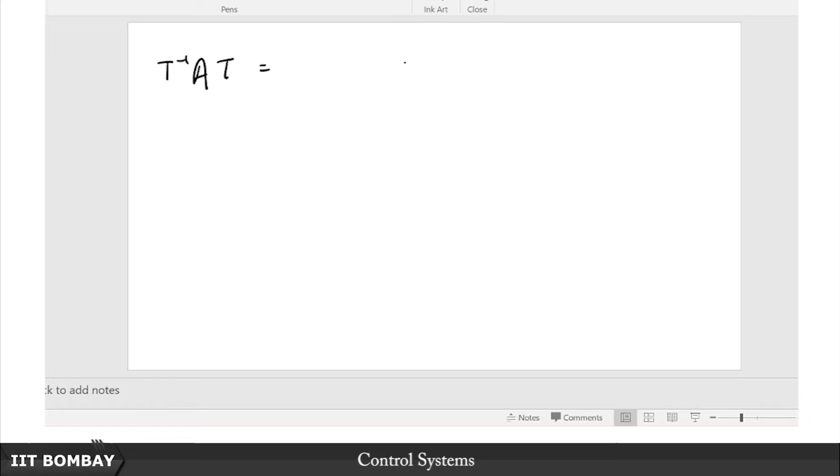So to convince ourselves of this fact, we will again resort to taking a matrix to its Jordan canonical form. I do not want to go into other linear algebraic tools. One tool is enough, and it will turn out that even though in some cases it is not the most convenient tool, it will still suffice to convince you that if you have this T, then T inverse A T, there always exists such a T inverse such that you can take this matrix A, any square matrix A, to a Jordan form, and correspondingly the B matrix will be transformed to T inverse B.

So what does the typical Jordan form look like? We have seen that lambda 1, lambda 2 till lambda r, that is one sort of Jordan block. This is another type of Jordan block. Of course there can be many more such blocks, I am just drawing one typical sample of each.

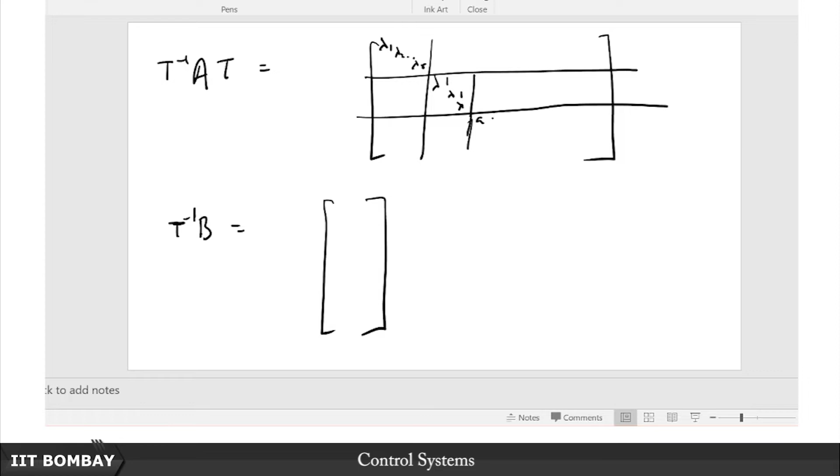Then there is this block, the way I have drawn it is probably A B minus B A, it does not matter, you can allow B to have any sign and it does not matter really. That is one type of Jordan block. Then there is another type, where you can have complex poles also repeated. So A, B, or A1, B1 minus B1, A1, then A1, B1 minus B1, A1, and then I2 here. So you can have this type of Jordan block as well.

So we have seen when this system fails to be controllable: when you look at the A matrix and find that in this diagonal block some diagonal entries are not distinct. So when some diagonal entries are not distinct, we have seen that it loses controllability and therefore also minimality by extension. So what happens when some diagonal entries are not distinct? Consider only this small block here, because these blocks are decoupled. I am going to just consider the small block here that corresponds to this, and this is of size R.

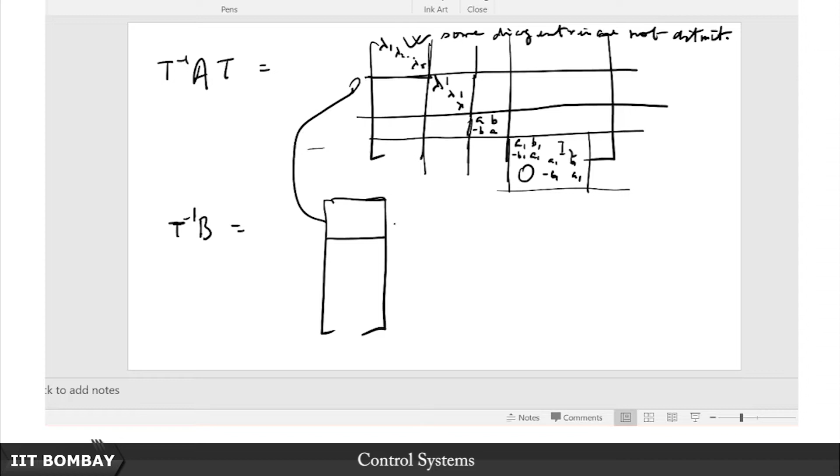So the first R entry, this is BR. T inverse B, I am only considering the first R, and this T inverse AT, I am considering the first R cross R block. So what does the structure look like?

Suppose this structure looks like lambda 1, lambda 2 till lambda R, and suppose you have this B matrix, this T inverse B, which also has some entries B1, B2, BR. Suppose these are non-zero. Of course if one of them is 0, then you immediately see that the dynamics is not at all affected by U.

So first let us start with the easy observation. Look at B, we'll get back to A later. So when does a system in the Jordan canonical form fail to be controllable on account of the structure of B? When for this diagonal block any one of these entries is 0.

So if any one of these entries is 0 here, what happens? You see that particular system's mode, that particular eigenvalue, that particular system's mode will be xi dot equals lambda I x, and no matter what input you apply, it will not be reflected here. So clearly whatever gains you might design, it is not going to affect the dynamics of this mode, so it is going to remain uncontrollable.

Similarly, if you look at a block such as this, if both of these B entries are 0, both of these entries in the corresponding B matrix are 0 - if this is your A and this is your B matrix - then obviously nothing that you apply at the input channel ever gets passed on to the states, so it is going to be uncontrollable. You cannot place these poles.

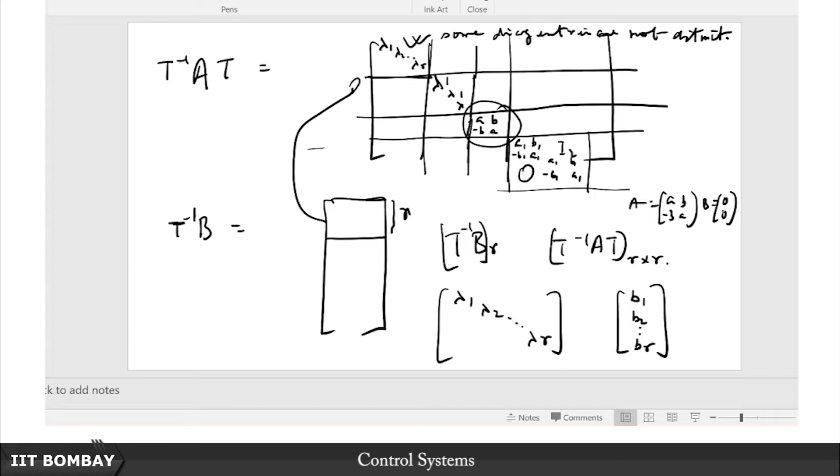Similarly here, if in this block Jordan form, if both of these last two entries of the B matrix are 0, then what happens? Nothing can affect these modes, same thing as the earlier case.

So this is going to lose controllability, and because it loses controllability, at the same time you lose the ability to place the poles, because no matter what you apply at the input, after all you are only placing the poles through a state feedback applied at the input. So if the input itself falls flat on its face, nothing is changed. So you cannot influence those particular poles, at least this last pair of complex conjugate poles.

Similarly here also in this block, if the last entry happens to be 0, then at least this pole - the others might be placeable, I do not know - but at least this pole cannot be placed. So therefore you see that the moment every condition you see in terms of the matrix B that is tantamount to lack of controllability also leads to loss of the ability to place those certain poles.

So whenever you lose controllability by one of these factors, by some entries of this B matrix being of 0 value or the other, it also immediately brings with it, like a combined package, your loss of the ability to place certain poles. So therefore loss of controllability leads to loss of pole placement ability.

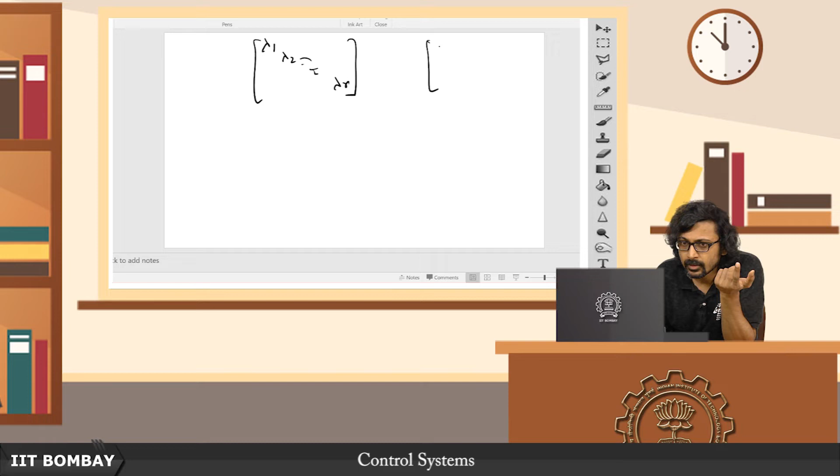So suppose if there is a diagonal - I will show you why in the block diagonal case at least - if any two of these fellows happen to be equal, then you will not be able to place your poles even if all your B entries here are going to be non-zero.

So let us say this is B and this is A. I am just going to look at the small block here. So, without loss of generality, let lambda 1 equal lambda 2. Then look what happens, and suppose your K matrix is K1 dot dot dot till Kn. So then what happens? Look at A plus BK.

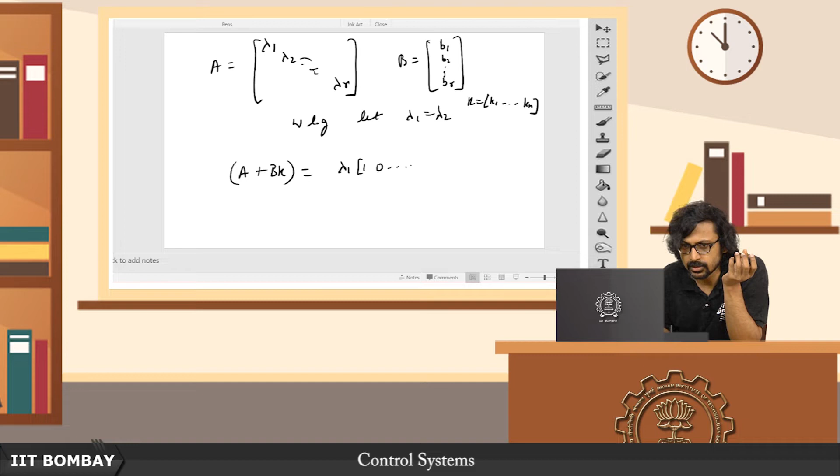A plus BK is basically lambda 1 times 1 0 0 0 - you agree this is the part coming from A, that's the first row - plus B1 times K, you agree. The second row is lambda 1 times, because lambda 1 and lambda 2 are equal, times 0 1 0 0, plus B2 times the same K. If I am just looking at the first two rows of the A plus BK matrix, then this is what it is.

Now we have assumed that lambda 1 is equal to lambda 2. Now notice what I am going to do is find the determinant of this - or rather, what I am going to do is find the determinant of lambda I minus this, because I want to find out the characteristic polynomial. So this will require me to find out lambda I minus this whole fellow's determinant. Sorry about the atrocious notation here. So this is what I am trying to do.

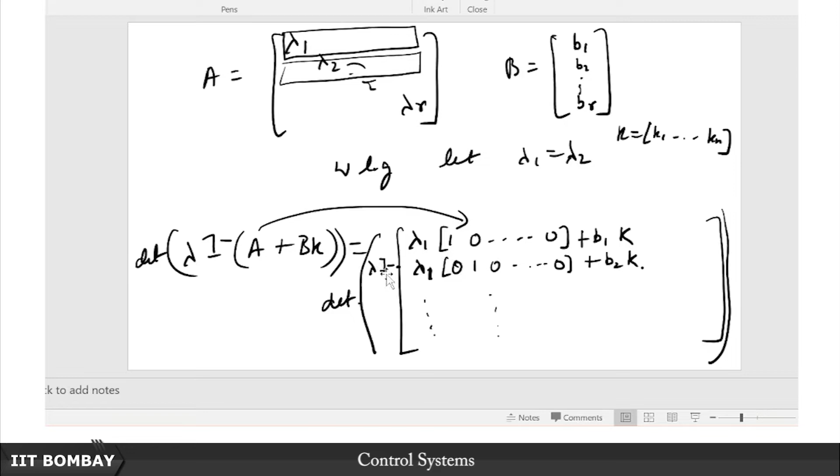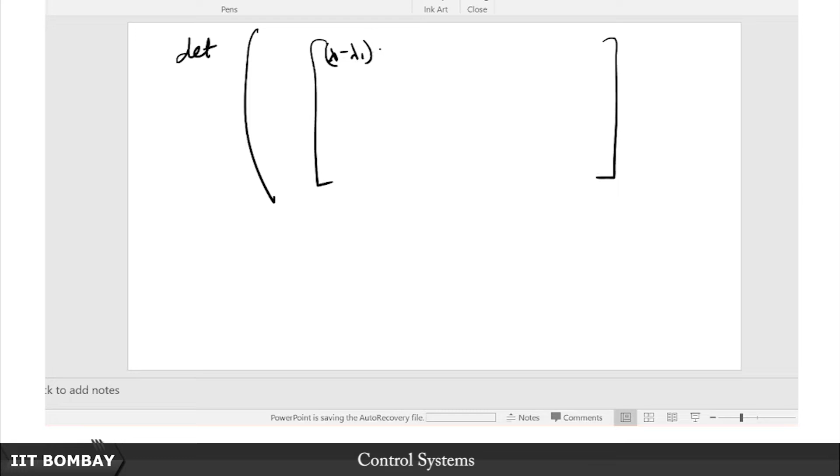I do not care about the other columns, let us just focus our attention on the two entries of this diagonal block which are equal. What happens then? Now you notice this is going to be nothing but, well, what is this lambda I? So now I am going to write the first two entries. This is going to be the determinant of this big matrix - lambda minus lambda 1 times 1 0 minus B1K, and this is also lambda minus lambda 1 times, but the vector is different, 0 1 0 dot dot dot minus B2K.

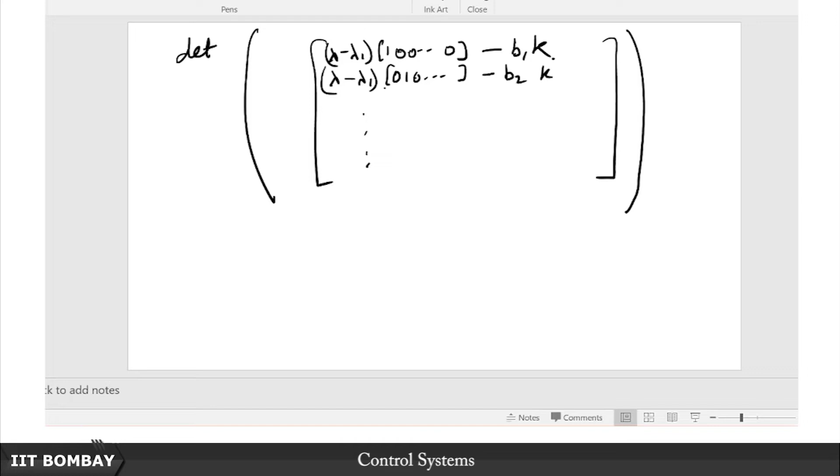Now if I want to find the determinant of this, you see what I can do is, since determinants are invariant to row operations - in row 1 I am going to change it as row 1 minus B1 by B2 times row 2, okay. So row 1 becomes row 1 minus B1 by B2 times row 2, and I place it back.

So what happens then? Just refresh your knowledge of determinants, if you have forgotten the operation, this is how we do it. We have lambda minus lambda 1 times 1 0 0 minus B1K minus B1 by B2, again lambda minus lambda 1 times 0 1 0 plus B1K. So this B1K and B1K will cancel out.

What am I left with then? You see, from the whole of this row I can take this factor out common, lambda minus lambda 1, and then I am left with this determinant. I do not care about the second row anymore, I have retained it as it is - this is my R2, this is my R1. So the second row I retained as it is, the first row I changed by operation, and now I am taking lambda minus lambda 1 out common from the first row, because I can - that's a standard determinant operation.

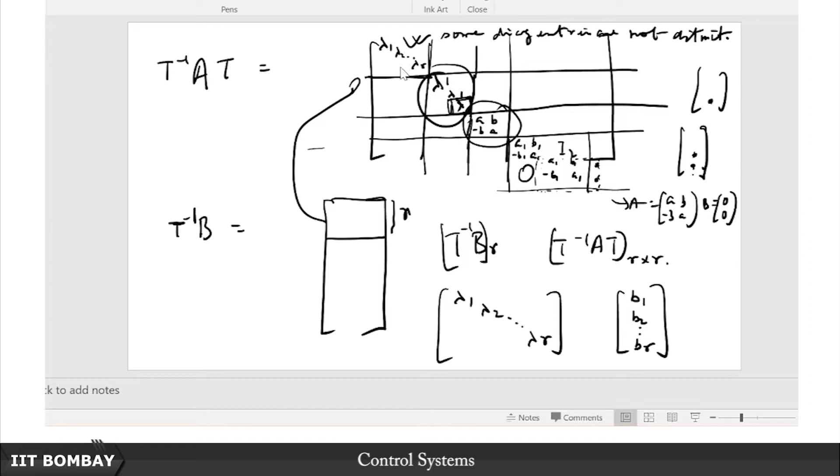Now that means that lambda 1, whether I like it or not, is always going to be a pole of the closed loop system. Lambda 1 was the pole of the open loop system, and lambda 1 will also continue to be a pole of the closed loop system, and that is only happening because I had some repetition of eigenvalues, or repetition of entries in the diagonals of this diagonal block, which is tantamount to loss of controllability. So loss of controllability tells me it is also going to lead to my loss of ability to place this particular pole which was repeated in the diagonal block.

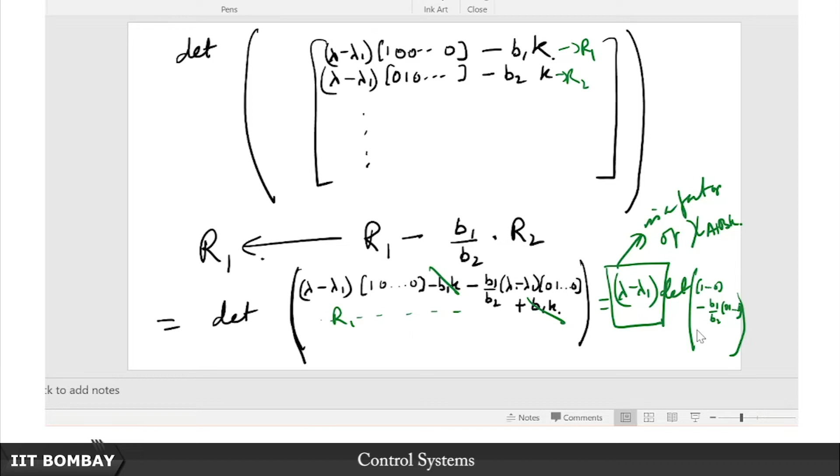So whether you lose controllability due to the structure of the B matrix or due to the structure of the A matrix—I haven't tackled the complex block, that I leave to you as homework—it is always going to lead to your inability to place some pole or the other. Some open loop poles will continue to remain closed loop poles, you cannot place them, they are the stubborn ones. So controllability is not just a sufficient condition as we saw previously, it is also a necessary condition for your ability to place each and every pole of the system.

That is the point I wanted to highlight, and hopefully I have convinced you that controllability is not just important for taking states from one point to another in the state space, but also has functional utility in controller synthesis. It is this property of controllability which allows you to design a linear state feedback, enabling you to place your closed loop poles anywhere you like.

So this looks like a triumph of modern control theory, a big result. Earlier we struggled to even stabilize an unstable system using root locus based methods, as highlighted a couple of lectures back with an example. If you have a pole on the right half plane and maybe a zero at the origin, no matter what stable controller you apply—P, PD or whatever—you cannot use an unstable controller, that only makes matters worse. You always end up with one of your poles on the right half plane. So that is a failure in some sense, but this is where modern control apparently triumphs.

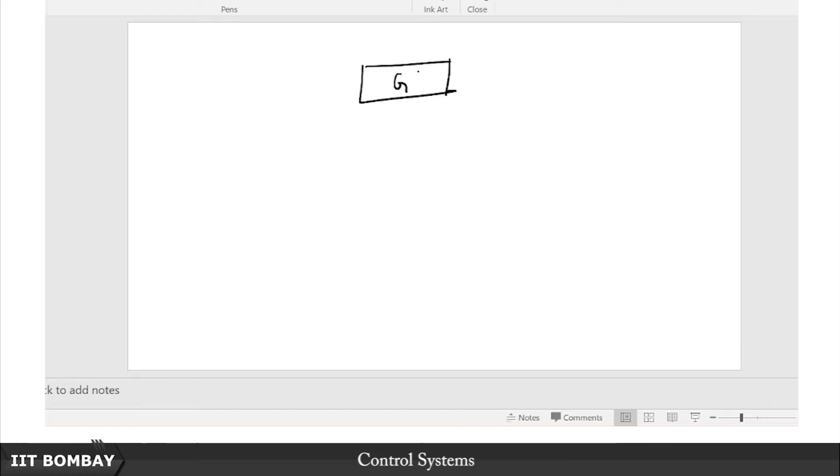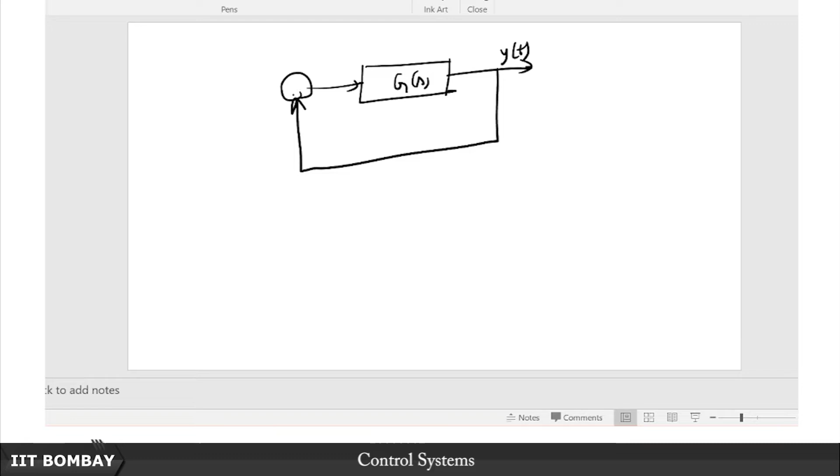But those of you nitpicking further would point out that I made a very strong assumption. Earlier you had the system G(s), with output Y and input, so you could only feed back this Y. This classical control method was crippled because it was compelled to use only the output—that is also because classical control does not take into account internal behaviors.

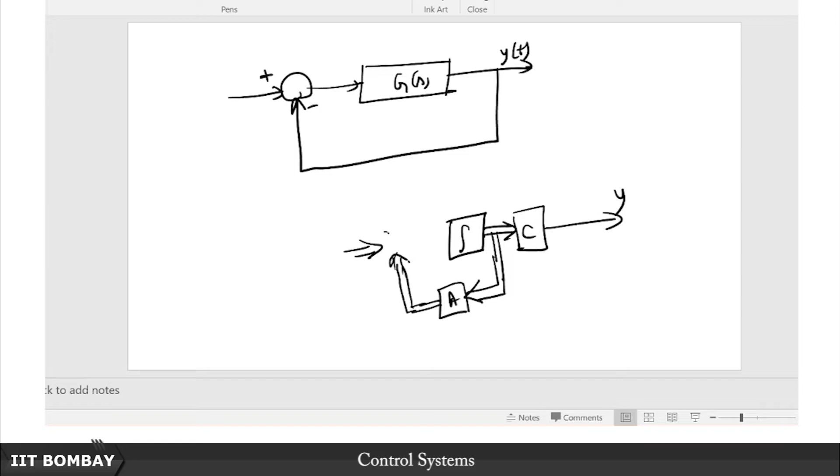But you might say, hang on, you are accounting for internal behavior through your state space, but that is tantamount to ripping it open—because what are you doing? You have this integrator here, these states coming out, passed through C to get your Y, and you feed it back through this channel with the A matrix. This is your effective state space design: X dot equals AX plus BU, with U coming in through the B matrix. So this was your basic design.

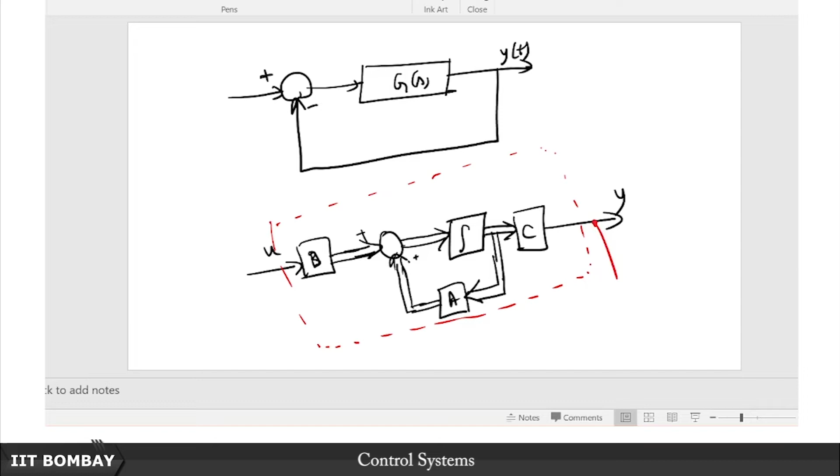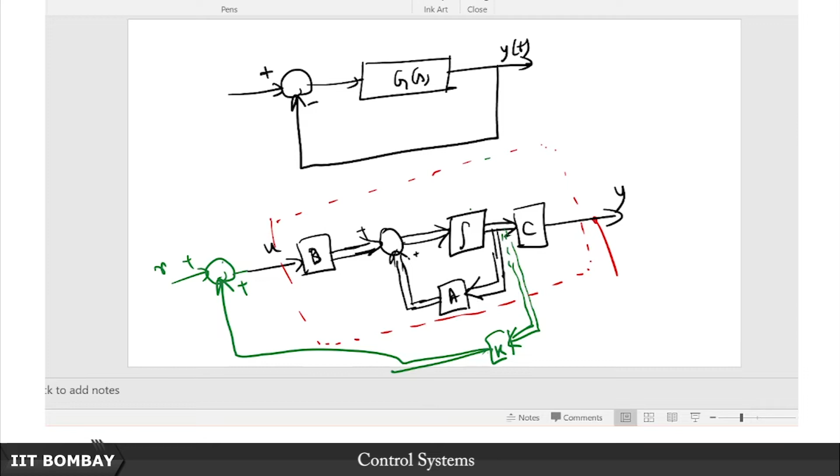You might say, well, I have described it in state space form because I precisely wanted that internal description. But who is to guarantee that you will always be able to look inside the system and tap in at a point inside it? What if the wiring is such that you cannot break it open? Then this whole state feedback method that you've been singing praises of is apparently no good. But remember, we have our old friend, the property called observability.

So you might wonder, can we not take y dot, y double dot, and so on till the y(n-1) derivative, and from this get our state information? In other words, can we not pass the output through a bank of differentiators?

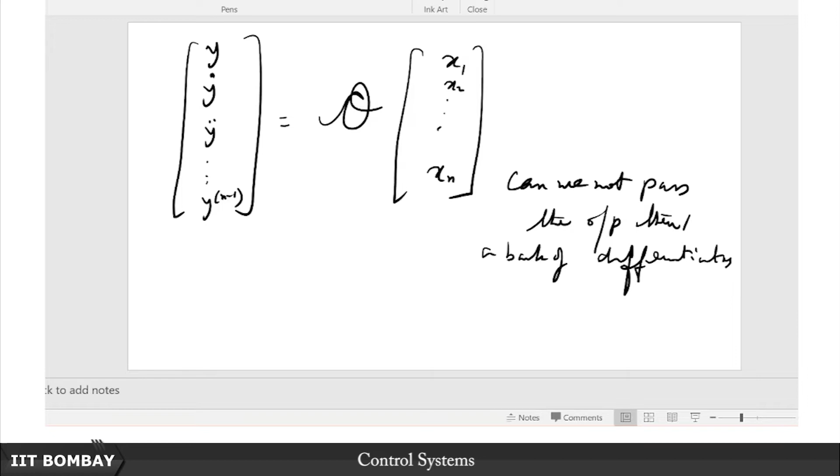So instead of saying this is how I've designed the controller, let me just say I am going to design it this way. So this C, then this A, comes here... excuse the bad drawing. There should be a B matrix here, this is the U and this is the C.

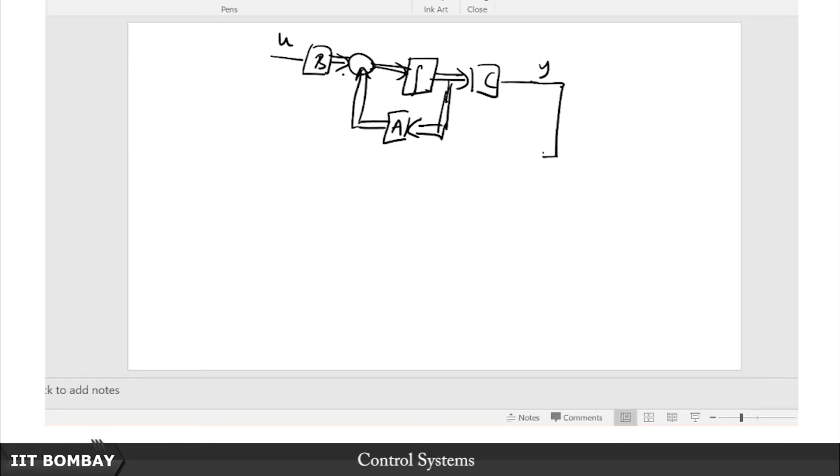So instead of tapping in through a point internal to the system, let me just say I am going to take this Y alone and pass it through a bank of differentiators, until there are n differentiators. I take tap-outs from here, and I have these n variables, and they are going to extract the information. Then I pass it through this observability inverse and get the states.

That vector gets passed through this K here. So this is my x now — through a suitable transformation, this observability inverse leads to the x here. Then that x passes through K, and this Kx is another scalar that gets added with this, and this is my external input.

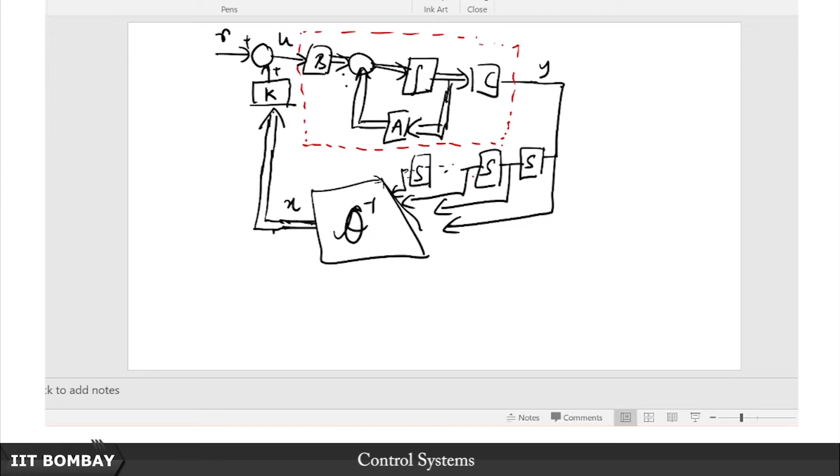Now you might say, well, if you're not happy with me tapping inside, then keep your box closed, keep it to yourself — I don't want your secrets inside the box, let it be unopened. I'll just take the tap-out from here and pass it through a bank of differentiators. But then you might pick a hole in my argument and say, didn't you just say a few lectures back that it's a bad idea to use differentiators because they amplify noise? So what is it with using this same differentiator again?

It is a bad idea, isn't it? Your system might have signals at higher frequency, and if there is some noise, these differentiators would have higher gains at those noise frequencies, so the signal gets corrupted with noise. This x information, the state information you get, is probably not going to be very useful for your feedback. Grudgingly, I will have to agree — you are right, you've caught me there.

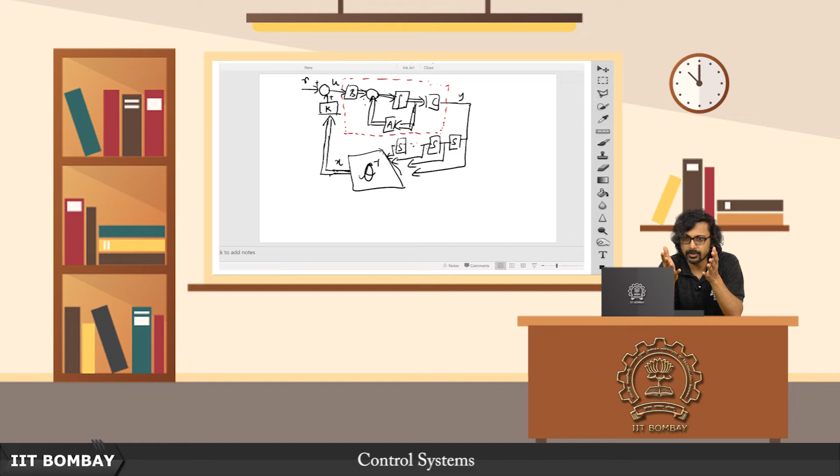So then what is the way out? In principle this works at a theoretical level, but if you want to practically implement it, you can't use differentiators. So then what do we do? Remember, when we implemented differential equations, we didn't use differentiators, we used integrators. Can we not use the same thing here?

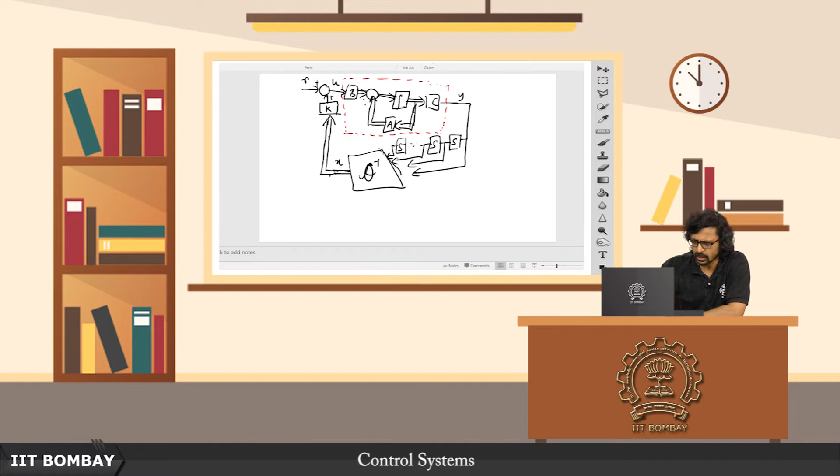In other words, why not use an open loop strategy like this? Suppose this is the input you are giving, passing through B here, then it becomes Bu here, then it comes through from some A matrix, then there's this bank of integrators which spits out the state from here, then there's this C matrix which gives you this Y. So this is the typical state space diagram.

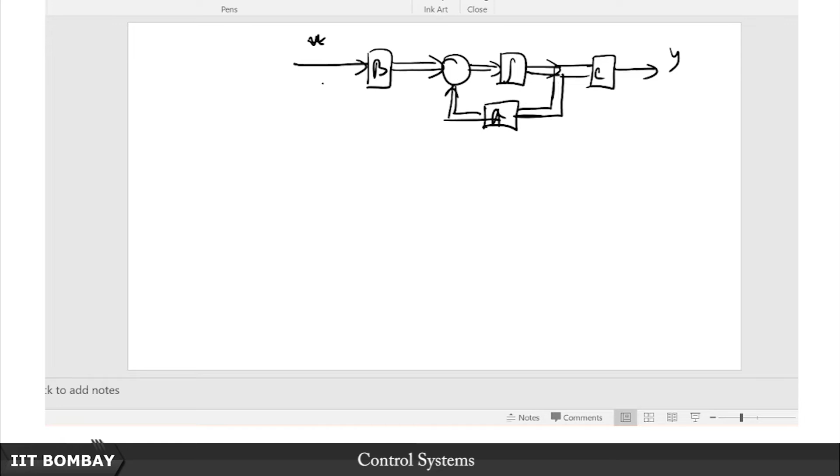Now let us say this is the actual plant. What if I just use the same signal and simulate this plant? So I use a model of this plant — I know exactly what the model is going to be like.

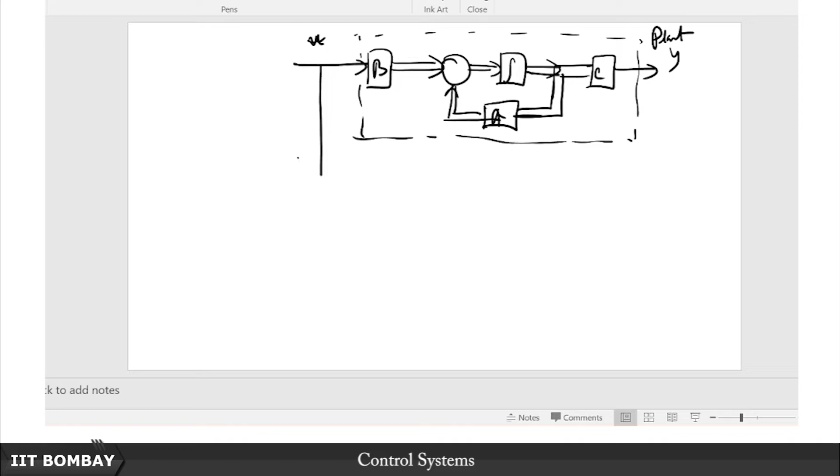Let me not draw this again in so much detail, let me just say that I am going to use a model of this plant. X hat dot is equal to A X hat plus B u, and Y hat is equal to C X hat plus D u.

But more importantly, because this is a model that I have created, I can tap in now. I may not be able to tap into the actual plant because you say there is this box which has to be kept sealed and unbroken, right? You cannot break into the box and tap in at any point you like. So I will say fine, I will not do that.

What I will do is, I at least have access to the input. So let me just tap in at the input terminal and feed it to a simulated model of the actual plant. Now this model I can play around with as I like. Of course, then what I have here is, look, what is the difference between these two?

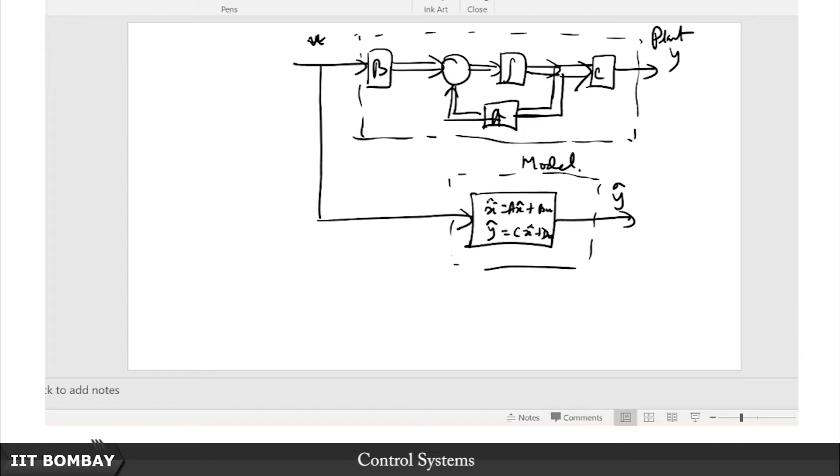X dot is equal to A x plus B u, and X hat dot is also equal to A x hat plus B u. So if I take X minus X hat, whole dot, let us say this is E, the error, then this is going to be A times X minus X hat, which is A E. So therefore the error, if I tap out of here, what I will get is essentially X hat.

Remember, and that X hat then I can use for my purpose, to pass through a gain here K, and then I add it like here. So let me say that is my strategy now. This is what I would call an open loop observer, this model.

But there is a problem with this open loop observer. What is the problem with this open loop observer? The problem stems from the fact that this A matrix is going to determine the dynamics of this error.

But what if this error is non-zero? I may not exactly know what the initial value of the state of the model and the initial value of the actual system are, right? So then in that case, I will have some initial non-zero error. So E dot is equal to A E, and E0 is not equal to 0.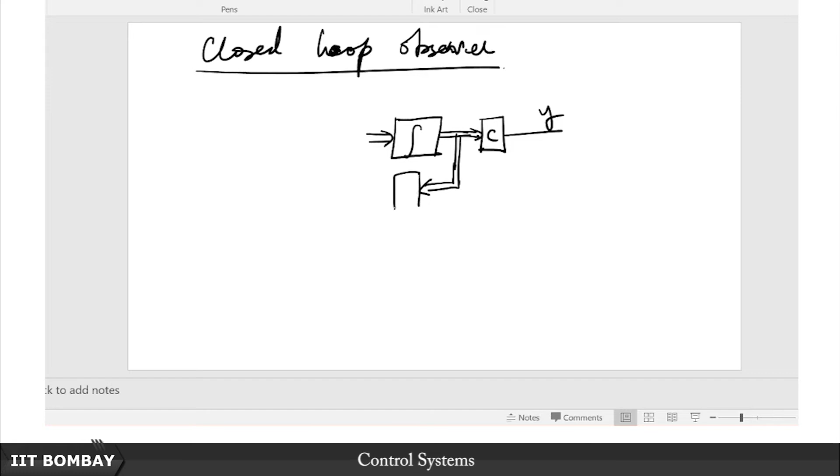So here we have the C, here we have the Y, and over here we have, of course, the system's A matrix. So we have this, and we have the B matrix. So this is our original system, all of this inside a briefcase or a black box that I am not allowed to open.

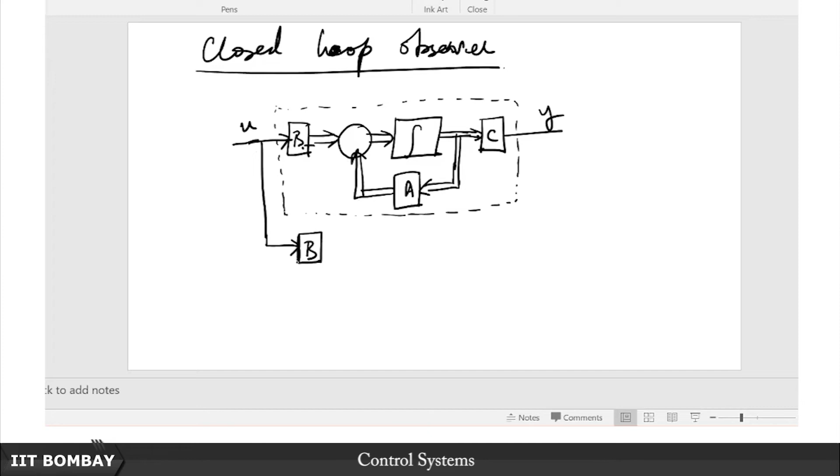So here is what I do - I take this, I pass it through another B. So now I am going to give you the detailed structure of the observer here. So where is this U coming from? Remember, this U can come from - okay, maybe I will get to that later. First let me draw the observer, and then I will draw the combined observer plus controller structure.

So I am going to draw this entire thing here, and then we are going to launch into an analysis of this. That will be the really interesting bit where we will see something called the separation principle. Again let us not get ahead of ourselves, let us just draw this figure here.

So this is of course going to be again this B times U here, but notice that what we are going to have here is now again this integrator, and again this is a model here. So this is the actual plant, perchance we were to sort of, this is going to be my y hat, okay, and this is going to be again my A matrix.

From this I take a tap in here and I add it here. So once I pass this through B, this also becomes a vector, so this is all added here. Now up until here there is no difference, right, you see that it looks exactly like the open loop configuration that I had drawn here.

So you might wonder where is this loop going to be closed, and this is where the beauty of this observer comes in. So where are we going to close the loop? We are going to bring this down here and pull this up here, and we are going to take the difference. So this is what we are going to do, we take this plus minus, and this then we are going to pass through.

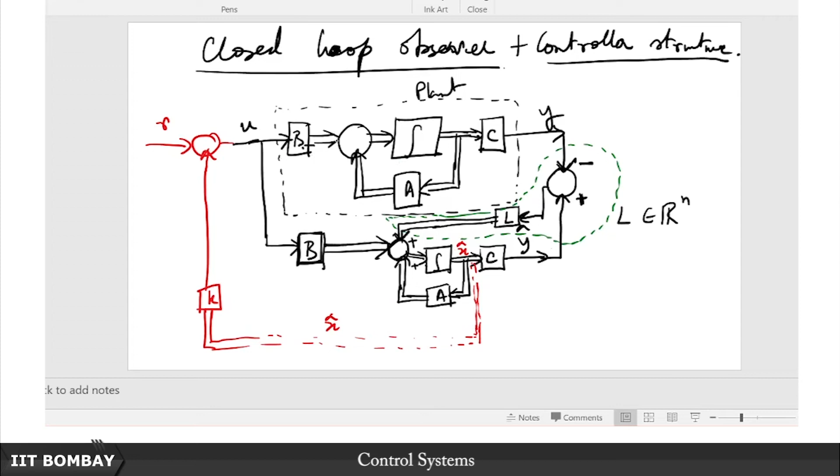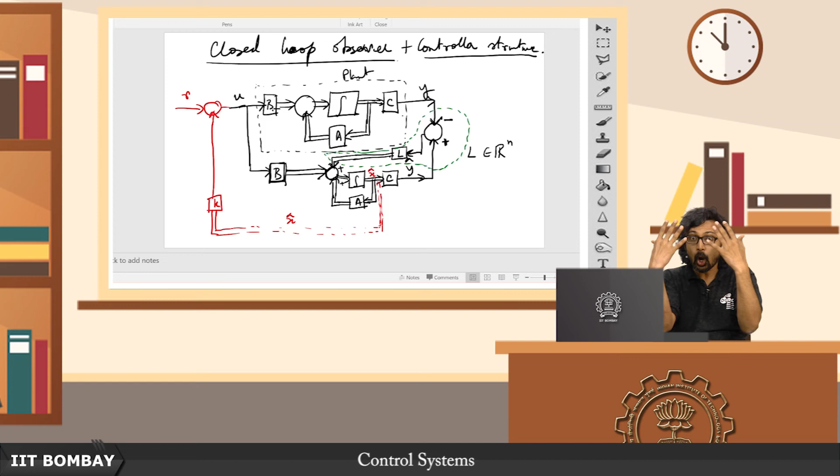So this red part I have drawn is now going to be my controller. Of course if you want to talk about the overall controller, then that is going to be everything outside this dotted black box. The observer plus this controller combined is the overall controller, so this is the controller plus observer structure. Now a lot of questions should spring to your mind at this point, like am I not tampering with the overall closed loop transfer function between R and Y?

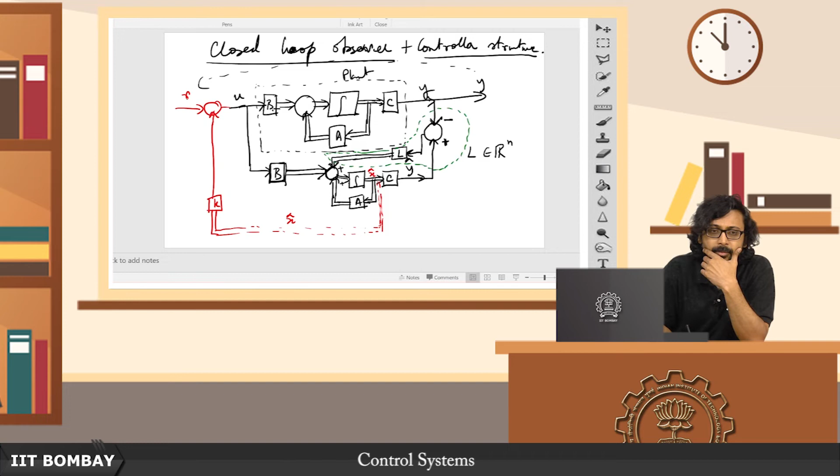After all, that is what I am most concerned with: whether this transfer function from R to Y still remains intact, and whether by putting in this L here I am messing around with those closed loop poles. What about the size of the matrices, what about the size of the transfer functions, the degree of the transfer function, how many poles are there? A lot of things might pop up to your mind at this point, and rightly they should bother you.

So that is what will motivate us to do the ensuing analysis, and that is why you will see that this is a stroke of brilliance. The idea of using this observer is actually a stroke of brilliance, and then we shall see that even though we are using this observer, at the same time it allows us to sort of move the poles of this observer model.

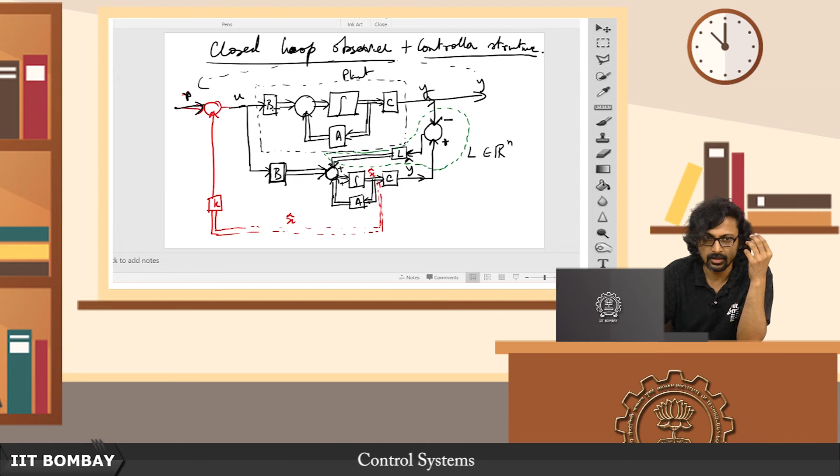Make them fast or stable as we please, which was essentially the problem here, because if A inherently was unstable or slow, then the error would never converge. But the use of this L here, this feedback here, would allow us to place the pole of the observer and thereby ensure that this error will eventually go to 0, this x hat will eventually converge to x. And if this x hat eventually converges to x, then except for the transient phase, at steady state x hat is equal to x, and therefore using x hat as an estimate or a proxy for x is good enough.

So therefore instead of tapping into the original system, I can tap into the model, which is something I have built, it is my design, so I can tap in anywhere I like. So that is the beauty, please appreciate the fact that what we are trying to avoid is to tap in at a point inside the actual plant.

So we can tap in at a point inside the model. A model is nothing but a piece of code, probably a software that I have written. In modern times it is going to be a software. So I can tap in at any signal at any point I like, and I can pass on a suitable commensurate voltage as a proxy for that state, maybe.

So now this is my overall structure, and henceforth the analysis that we are going to do is with this structure in mind, and we will see a lot of beautiful things emerge. So first let us write down the equation of this, keep this figure in mind.

Okay, let me start by writing the equations here itself. So what is x dot? This is x, this is x dot, this is x hat, this is x hat dot. Let me first write x dot. What is x dot going to be equal to? X dot is going to be equal to Ax plus Bu, which is going to be A times x plus B times - note what is coming here - u plus r. What is u? U is Kx hat, so it is going to be Kx hat plus r.

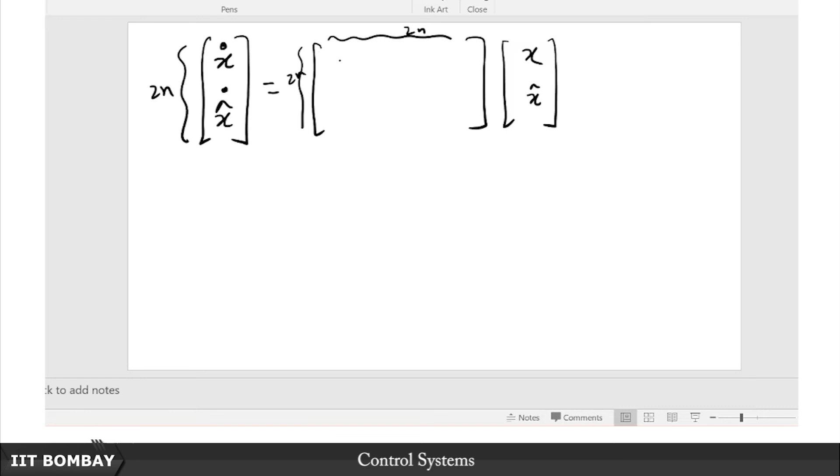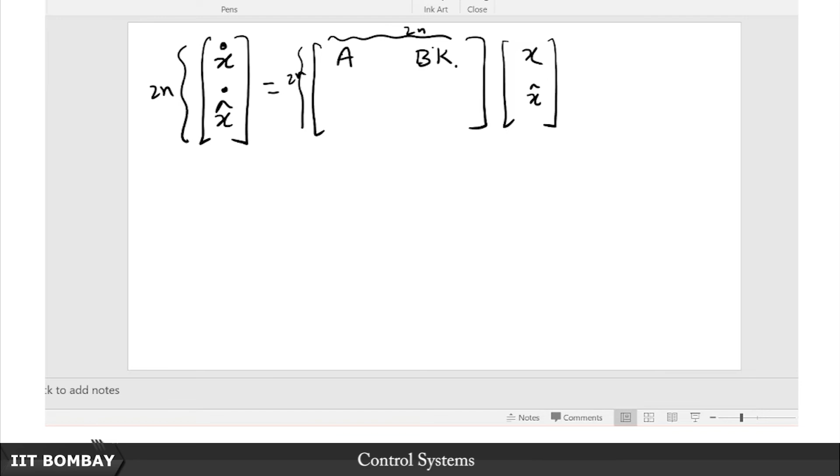Remember this is of size 2n, so this is a 2n cross 2n matrix. So I have a times x, plus bk times x hat. Sometimes people write minus kx, it's just a matter of sign, whatever numerical values you get the signs will be inverted. People are fond of using negative feedback, so I'm just using this bk and whatever you have here.

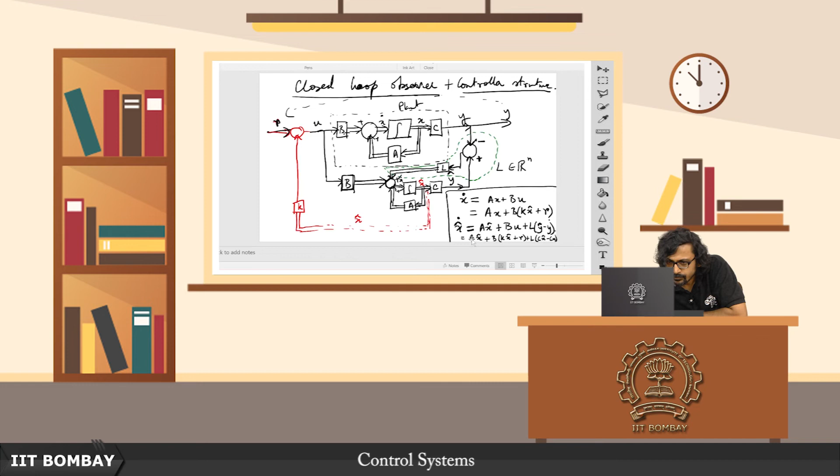I am not bothering with that, but the second equation is going to be interesting. What is the coefficient of x here? Minus LC, there is no other x appearing anywhere, so it is minus LC. And what is the coefficient of x hat? There is a here, there is bk here, and there is LC here, so it is a plus bk plus LC.

And what about the exogenous input? Well, that is quite simple, it is just going to be this b and b, and you have this r here, just see that both of them have this b times r appearing. So this is my state equation now in the 2n cross 2n system, the plant states and the observer states stacked up together. This is how I can write this up.

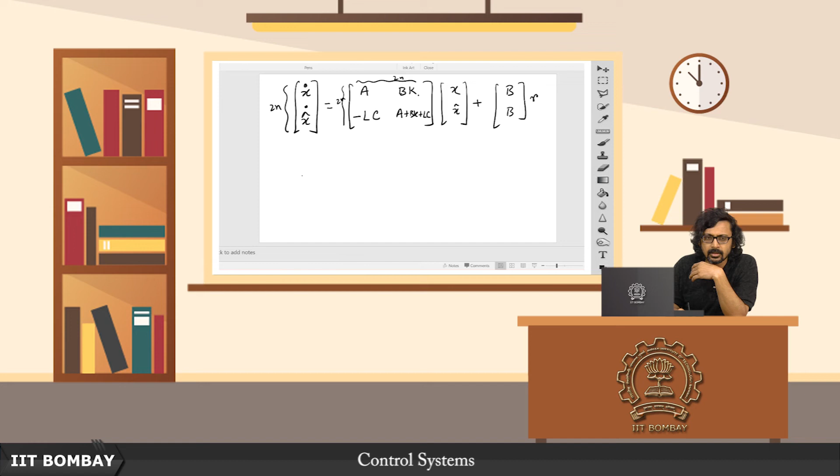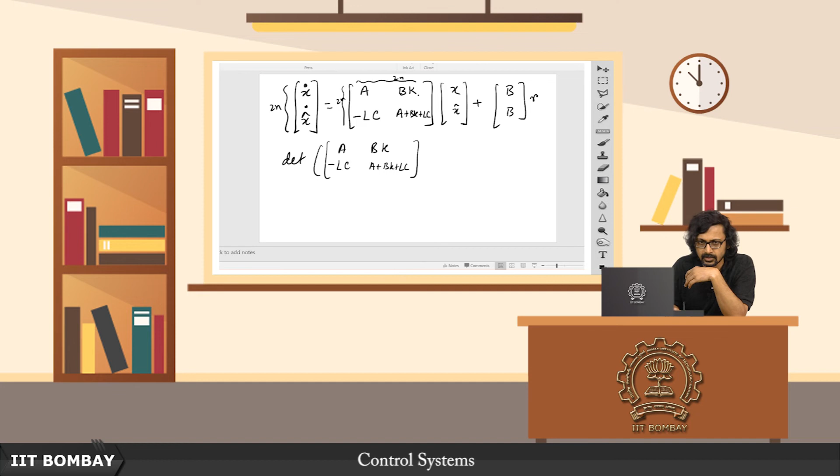Now notice, what are my poles? So then I want to find out the determinant of this block matrix, this A, Bk minus Lc and A plus Bk plus Lc. So in the closed loop, all my closed loop poles are given by this, right?

These are all my states. So if I want them to be determined, then I better evaluate this determinant. I need to find out what this determinant is, because this matrix is after all my closed loop system matrix. Once I have closed the loop around the observer and everything, this is my combined system, there are only 2n states, n coming from the plant, n coming from the observer. So now I want to evaluate this determinant.

Remember, this is of size n, this is of size n, this is of size n, and this is of size n. So again we are going to use the property of determinants: that you add any two rows and their scaled versions, or take linear combinations, the determinant does not change. You add to any existing column some alpha times any other column, the determinant does not change, and that is what we know. So we are going to use that property.

So what I am now going to say is, you have to be a little careful and pay attention. To these first n columns I am going to add the next n columns. To the first column I am going to add the n plus 1th column, to the second column I am going to add the n plus 2th column, to the third column I am going to add the n plus 3th column, to the nth column I am going to add the 2nth column, that is what I am doing.

If you observe a little carefully, this turns out to be nothing but, so I am going to just add these columns. Actually, because I want to find out the characteristic polynomial, I should write Si minus, because I want to evaluate the characteristic polynomial of the closed loop system. So I should have written Si minus, so I just did that, sorry about that. So this is the closed loop matrix, I want to find out determinant Si minus ACL, so that is exactly this, Si minus, I just change the minus sign here.

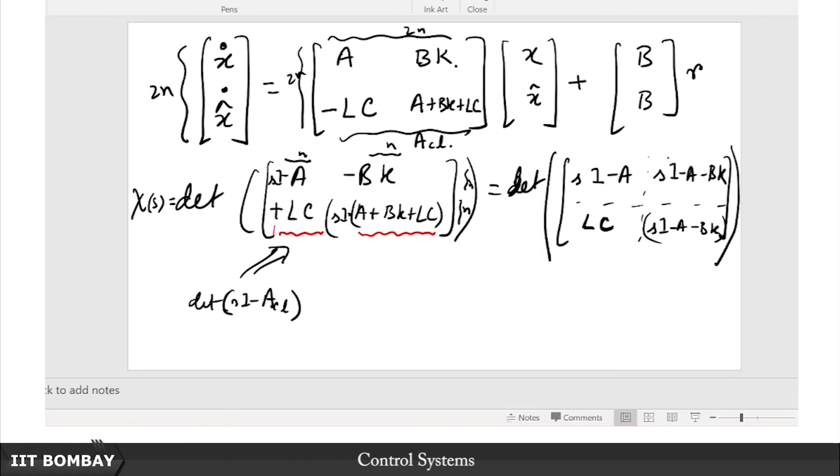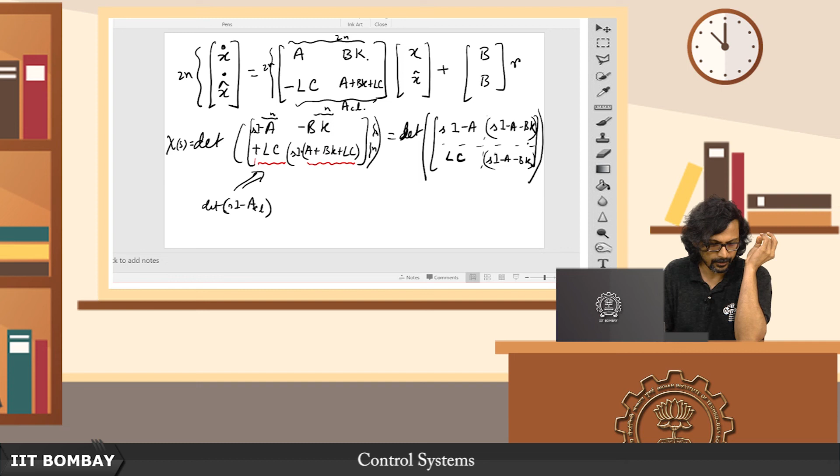So now what happens is, we get here Si, note that this is a minus sign here, so there is a minus LC, minus Bk, minus A here, and to that you add a plus LC, so this becomes Si minus A minus Bk, and this is beautiful, because just like I take factors out common from here, I can take out this factor common from here. This is nothing but Si minus A minus Bk times I, this is also Si minus A minus Bk times I, so I can take this as determinant of Si minus A minus Bk times the determinant of Si minus A minus Lc.

Or if you are uncomfortable with that, let me not do this. Let me not make you uncomfortable with this. Let us just go about it this way — let us just do the row operation now. So let me just from the first n rows subtract the last n rows. So first we did a column operation.

So then what we get is equal to determinant of Si minus A minus Lc, and this is going to be 0 of course, this is going to remain Lc, and this is going to be Si minus A minus Bk. So now if you expand by the determinant, you will see that this is now a triangular matrix, a block triangular matrix, and its determinant will be the product of the blocks sitting in the diagonals.

This is a well known result, that if one of these blocks is a 0 block — please note that this is not exactly the same as the usual determinant multiplication you have seen in the case of 2 by 2 determinants, 2 by 2 matrices. Block determinants are not like that, they do not always work that way, but in this case it does. See, if they had worked that way, then what I could have done here is just take Si minus A times this minus this times this, it clearly does not work that way.

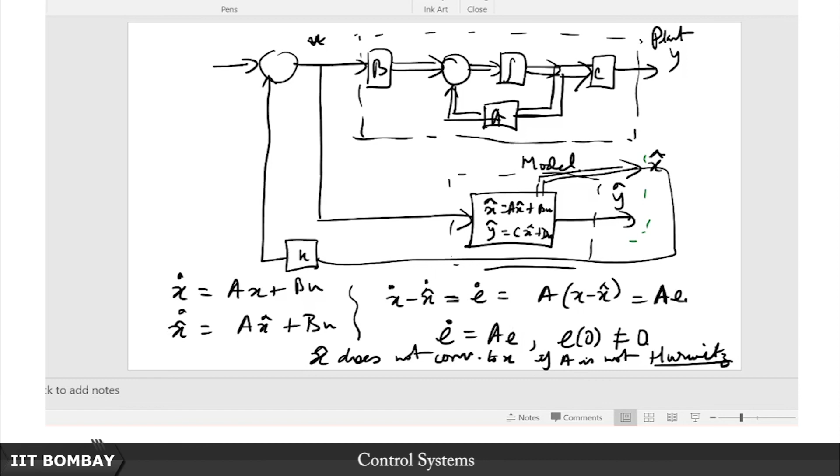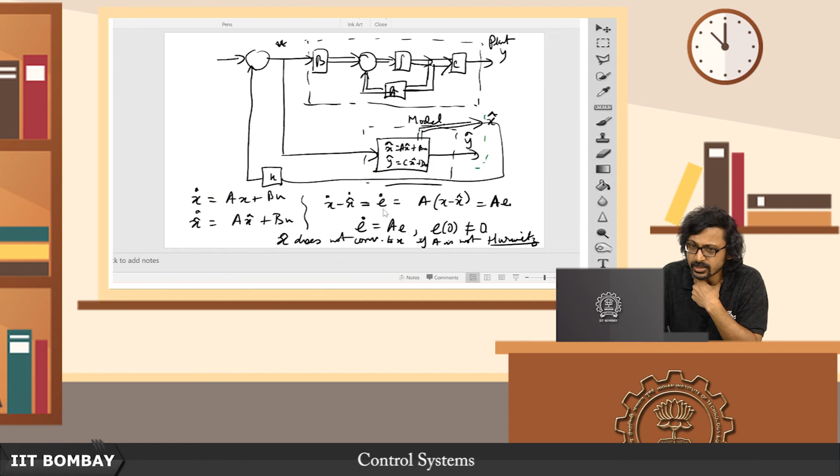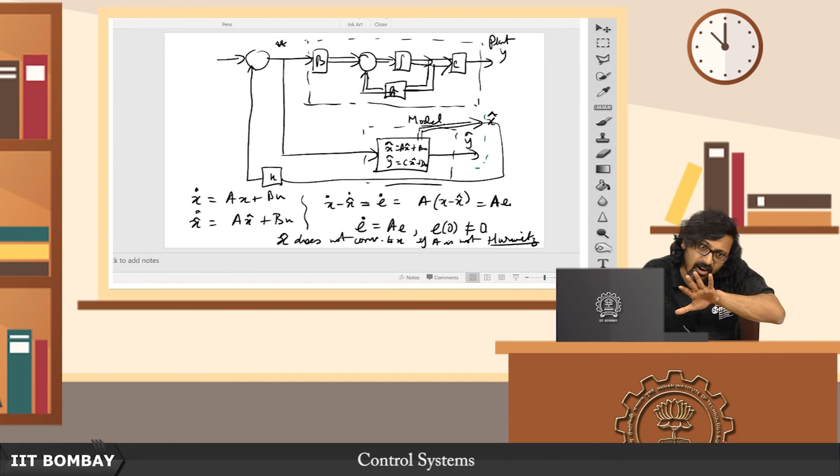So it is imperative that we are able to control the dynamics of the observer in closed loop, and this tells us that through use of this L, this feedback vector, we will be able to place those poles of the observer wherever we want. Once we are able to do that, we can ensure that the error converges as fast as we like, entering within some 2% band of 0 as fast as we want, by designing the observer to be fast enough, choosing the poles of A plus LC to be far enough to the left half plane.

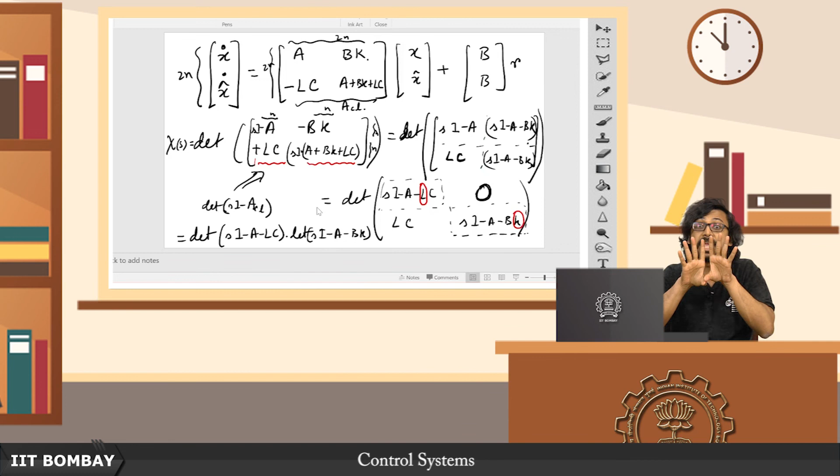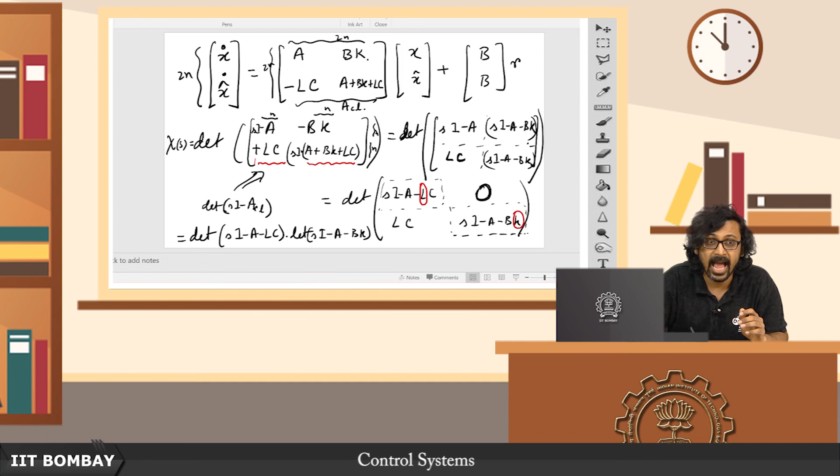So this tells us that the poles of the observer and the poles of the plant plus controller combined can be chosen independently, and this is a big sigh of relief. This tells us that by designing this observer structure, we are not meddling with the original poles that we expect to have with just the plant plus controller.

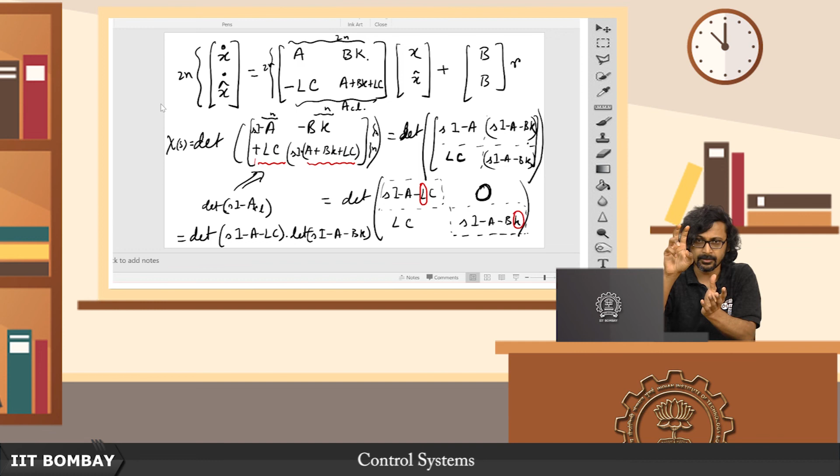So what we are saying is that by bringing in this observer structure, we are still retaining that original flavor, like what we had done by initially tapping into the states of the plant, as we had proposed before. We tap into the states of the plant, draw those states out, feed them back through this K matrix, and get A plus BK as our closed loop matrix. So those poles still remain intact through our design, and the observer poles can be designed independently.

So that is a big relief, that is what we have seen in this derivation here, but there is still one big question which we should need the answer to. That is the answer we shall see in the next lecture.

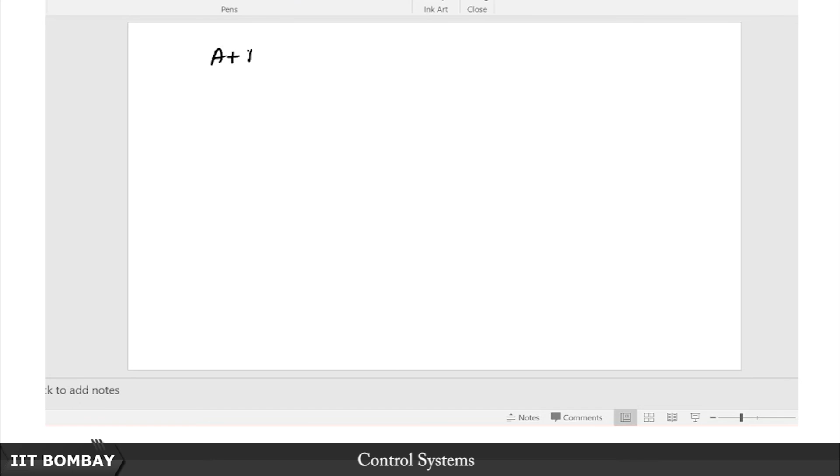The question still remains: it's alright, you have proved to me that the poles of the observer and the poles of the controller can be designed independently, so there is a separation between their design. I can choose L to influence the poles of the observer, and I can choose K to influence the poles of the controller. So you can clearly see that if I want to place the poles of the observer arbitrarily, then earlier I had A plus BK, and now I have A transpose plus C transpose L transpose. But remember, the eigenvalues of this are the same as the eigenvalues of A plus LC.

The eigenvalues of a matrix and its transpose are the same. So now what do I need here? Basically, controllability of A, B invertible was my necessity for pole placement of the controller. So then for observer pole design, I need controllability of A transpose, C transpose. But what is the controllability of A transpose, C transpose? I need this to be invertible.

So for this to be invertible, I need C transpose, then A transpose C transpose, then A transpose squared C transpose, likewise till A transpose to the power n minus 1, C transpose. But what is this? This is nothing but the transpose of the observability matrix. So basically, for the ability to place the poles of the observer anywhere I like, all the poles, I need observability to be invertible. So if the transpose of the observability matrix is invertible, so is the original matrix itself.

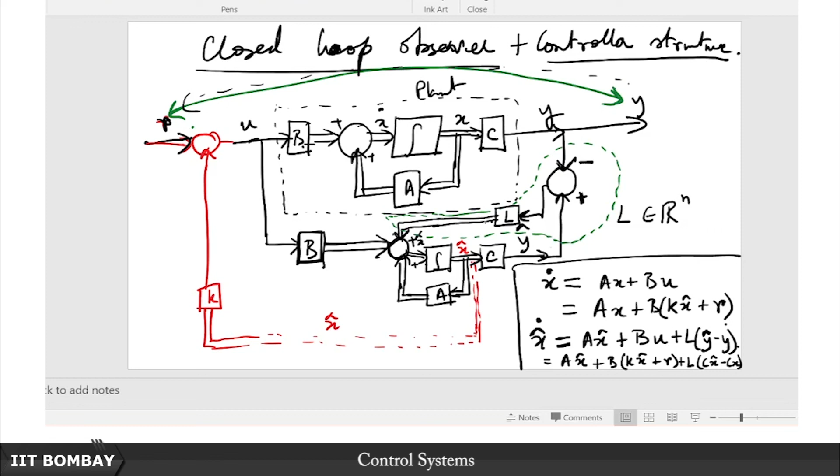So therefore I need observability for designing the observer's poles anywhere I like and make it as fast as I want to. But the question still remains: I understand the poles of the observer and the poles of the controller are designed independently. The burning question I want to leave you with at the end of today's lecture, which we shall answer only in the next lecture, is: it's alright, poles are independently designed, but what is the guarantee that if I go from this R to this Y here, the transfer function I obtain from R to Y is not influenced by these additional poles of the observer?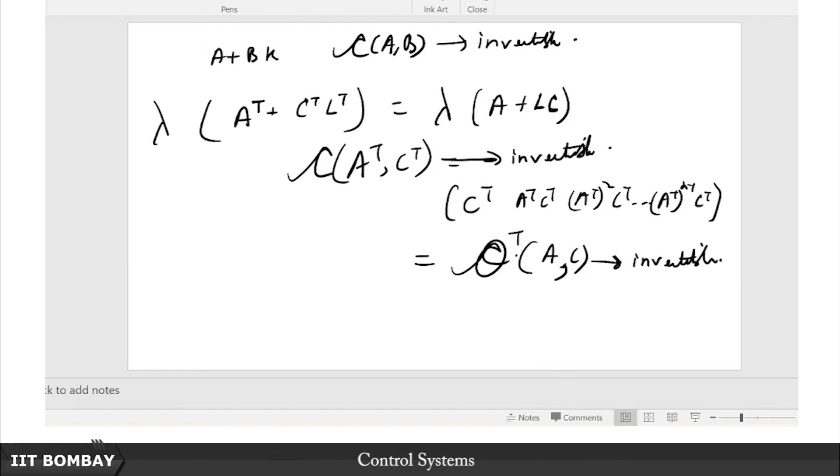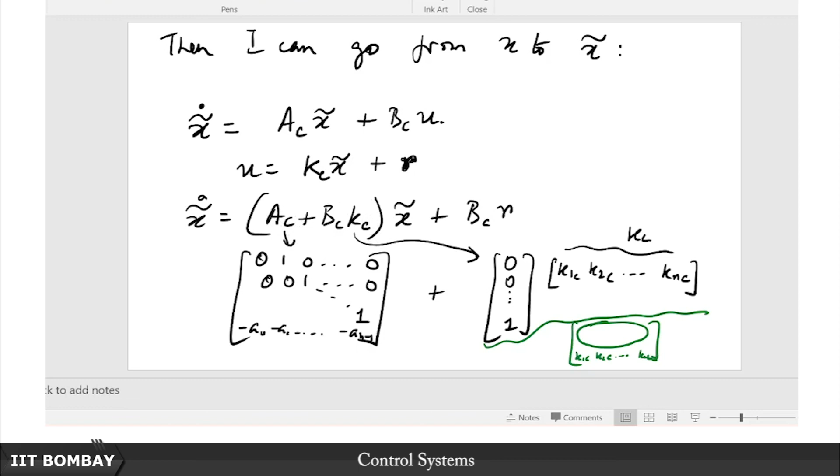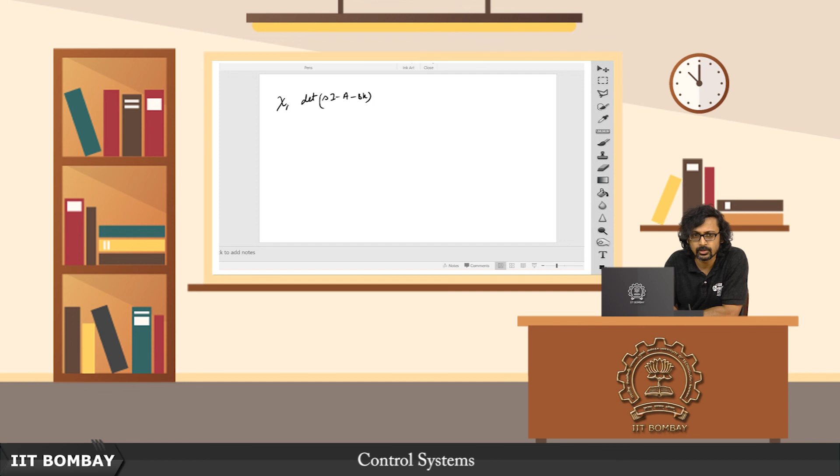Remember, in my original system that I had designed without this observer, before I brought in this observer requirement, even when I said I am allowed to tap into the plant, what was my closed loop system? Remember, many lectures back, or maybe last lecture, this was my closed loop system matrix. So my closed loop characteristic polynomial was the determinant of sI minus A minus BK. But now what is the guarantee that after adding this observer structure, some of the poles of this observer are not getting appended and some of the poles of the controller are maybe spilling over? I do not know that.

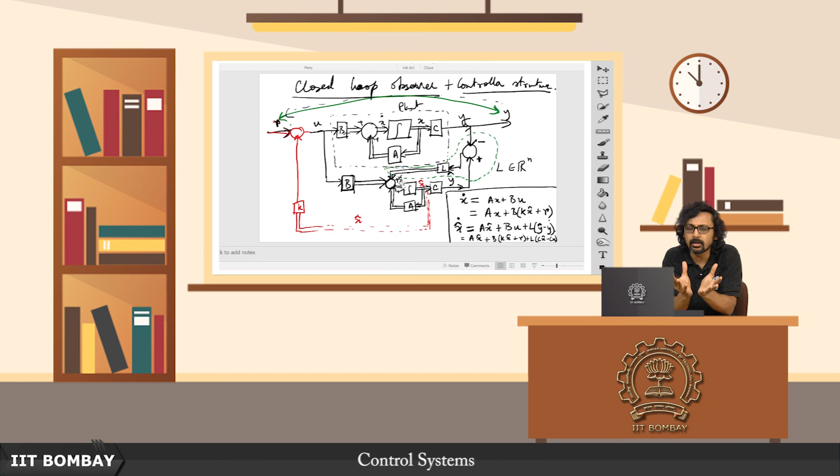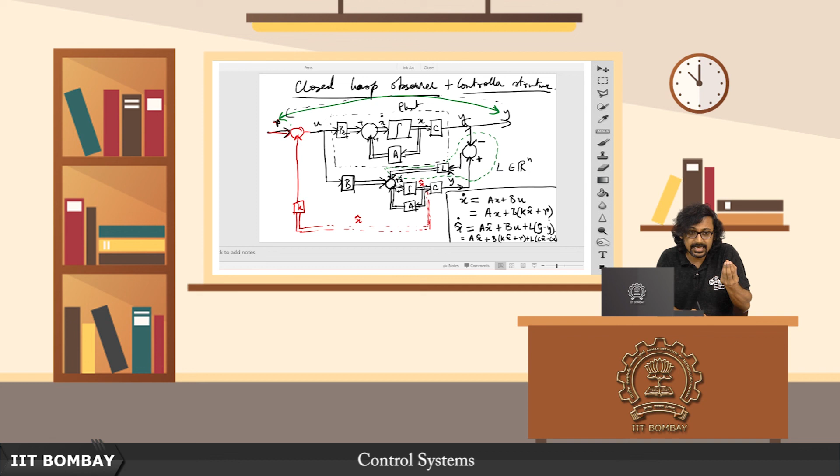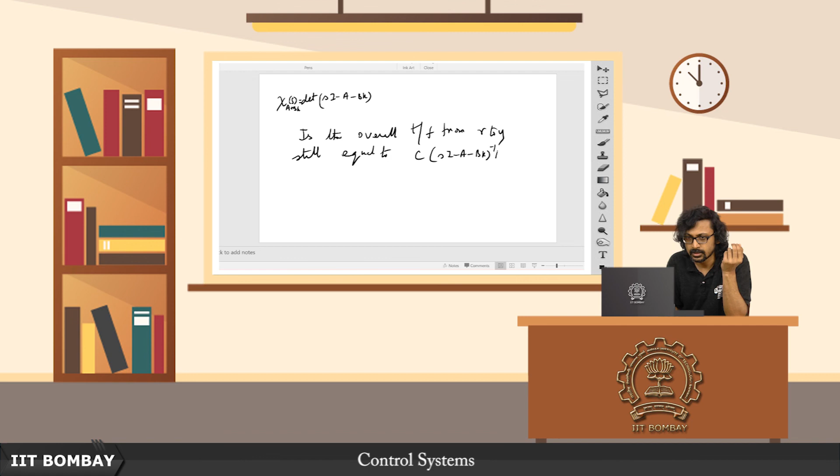I only know that the overall poles are nothing but the poles of the controller and the poles of the observer, but what about the transfer function from R to Y? Is it totally unaffected by the poles that I placed of the observer, or by all of this design? Is it still pure? So the question is: is the overall transfer function from R to Y still equal to C times sI minus A minus BK inverse B? Because that is what I need to answer.

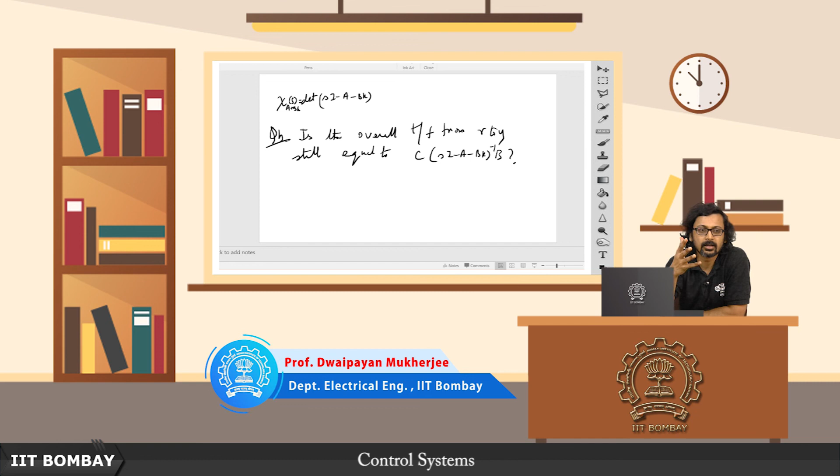So this is the question we shall answer in the next class, strongly in the affirmative, thereby convincing you that this observer-controller combination does nothing more than what I would have been able to do if I were allowed to tap into the states. But instead of tapping into the states, I am just passing on the output, and through this beautiful design of the observer and controller combination, I can place the poles anywhere I please. This is the derivation we shall see in the next lecture. Thank you.